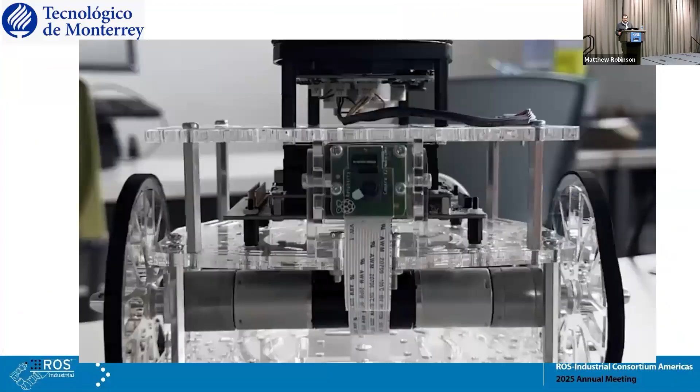Okay, well, basically, what we have here with the PuzzleBot, it is a Jetson. We have a camera, we have a lidar, and those students, particularly in the bachelor degree in robotics and digital systems, are basically learning how to program the device. So one of the main advantages of this undergrad program we have at Tec de Monterrey is that we are concentrating on teaching them the programming of the robots.

We also have at Tec de Monterrey mechatronics, where they are learning how to better integrate electronics, mechanics, and computing. And in the Bachelor of Robotics and Digital Systems, they deal with software engineering for robotics, basically.

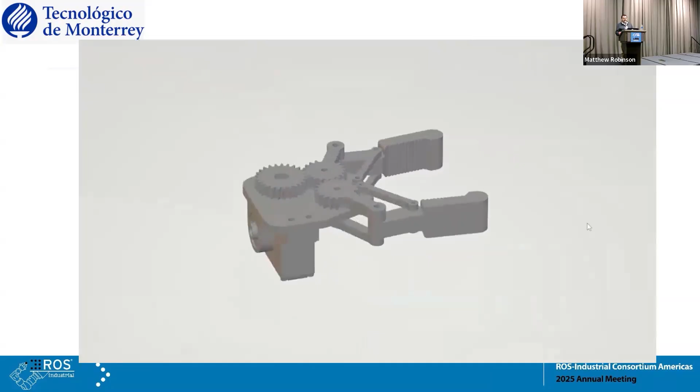So as you can imagine, at the beginning they learn how to set up the system and program with the Jetson. But one of the most amazing things is how we can push them to integrate new components, as was the case with developing a gripper and integrating it on the platform. The main idea was to set up a task where they navigate along an unknown space, so they have to rebuild it using SLAM. Once they achieve navigating with the robot and integrating the gripper, the main idea is that a user, a human, indicates to grasp a certain object. So the robot needs to navigate in the space it has already built, find the path, localize the object, grasp the object, and put the object abroad.

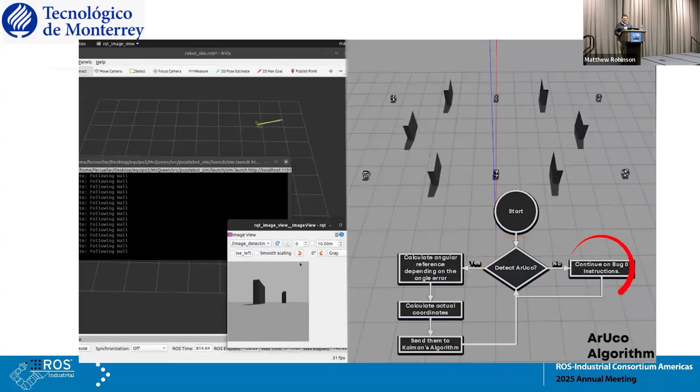So what are the most interesting things? Can we move a little bit, maybe 1 minute ahead in the video? Close to the end. Yeah, I'd just like to move forward.

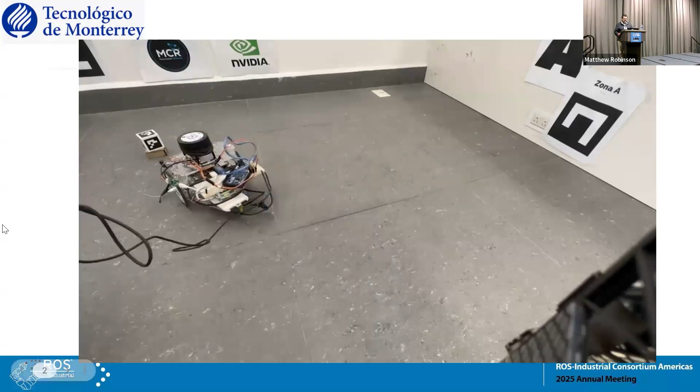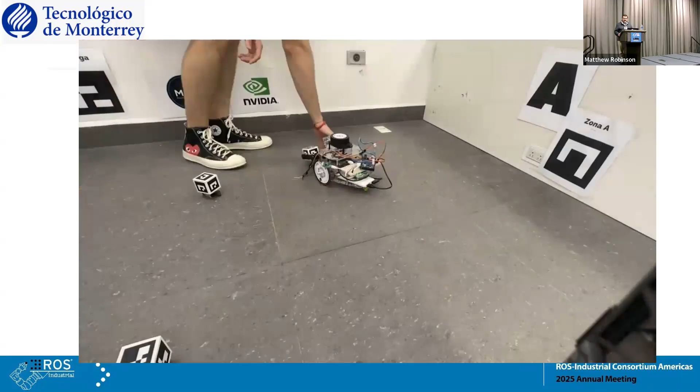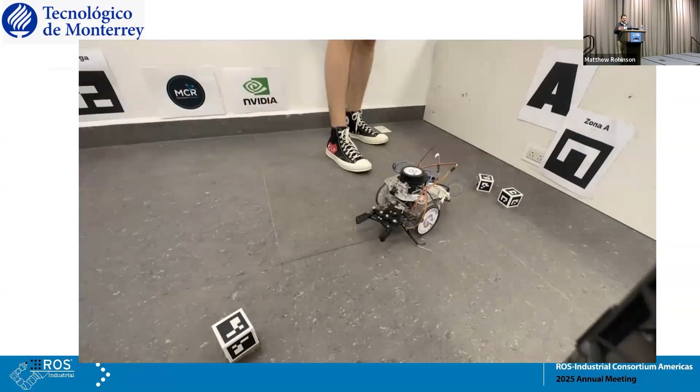So they spent the full semester working on that challenge. And what I like to underline is that this is a new model we have at Tec de Monterrey. They are learning how to program the devices, learning kinematics, dynamics, control, and programming, and they are given a challenge. In that case, the company defined the challenge, and we were in charge of supervising the students to achieve those results. So as always, as we have today is Teachers' Day worldwide, I'm very happy and very proud of my students.

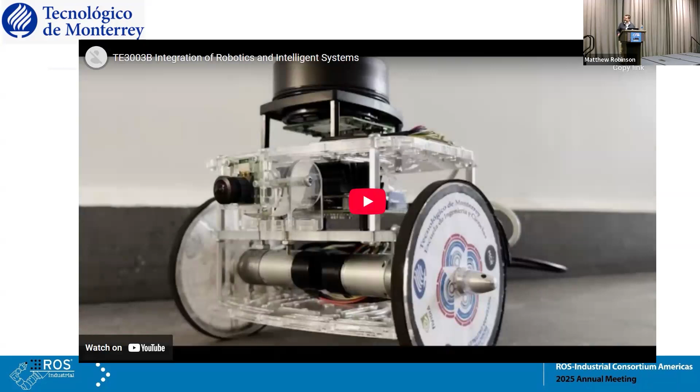So I'd just like to present a little bit about Tec de Monterrey. We are by far the largest university in Mexico, with presence nationally in 20 states. It's a university founded 81 years ago, established in Monterrey, close to Texas. We have already graduated close to 500,000 alumni, and we have very good recognition worldwide. We are basically an engineering school, and of course we have a business school, humanities, and other areas, but we are basically university-industry oriented.

So we have a very strong relationship with industry, and as you can imagine, one of the main challenges now with ROS Industrial is how we can better integrate ROS into the curricula. So we are starting with the robotics and digital systems bachelor. We have very nice dynamics with this project, with regular meetings with my friends at the University of Manchester in the UK. We are collaborating together, with sessions twice a week, 4 hours of collaboration with our partners. In that way, the students are at the same time learning about the use of the technology, and we are teaching the subjects, so they have the way to integrate the system.

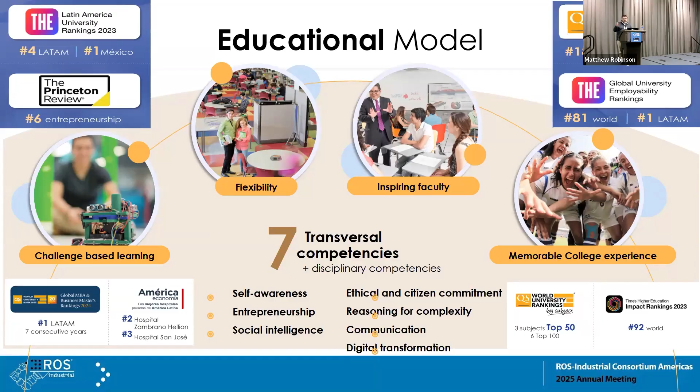As well, we are pushing the students to find a way to understand how the companies are actually working, and of course, they are complementing those subjects with a set of toolboxes that we are providing them during the time they are developing the project.

As you maybe remember, 2022 at IROS, we have this slide that sometimes is useful, because most of the students, the new generations, are looking for new challenges, so we are trying to align it.

In many countries, we have the obligation for the students during the curricula to spend 200 or 400 hours of time on social services. So we are working on a nice approach where we spend those hours implementing robotics on some of those challenges. For example, we are working on issues related to mobility and inclusion at Tec de Monterrey, and trying to invite the population, the community, to propose social problems. In the case of robotics, we invite them to participate using something that can be implemented in ROS.

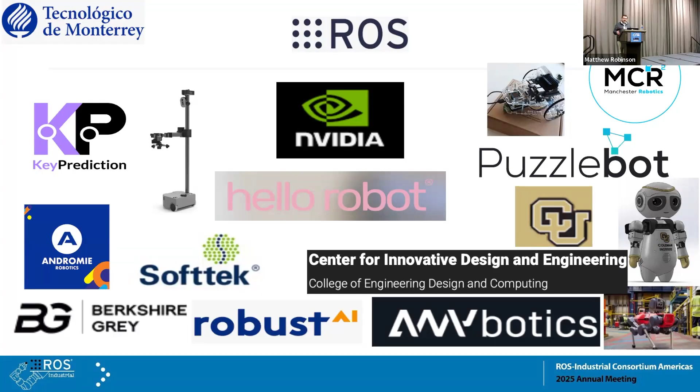Now we are trying to build a community in Mexico, so we are using a lot of materials from companies. We just acquired an ANYmal from ANYbotics. We are working with the Center for Innovative Design and Engineering at the University of Colorado Denver, and with Hello Robot. We have acquired a lot of robotics from other companies, trying to set up this community to make students and companies in Mexico aware of the importance of integrating ROS, industrial ROS basically.

We are combining research, innovation, and this Tec21 model in which we try to put the students to work all the time based on challenges, and at the end we think we can improve the way we use technology for societal pressures.

Now I would like to invite you to consider Monterrey for the next ROS Conference Americas, and of course people from all around the world are invited as well to come to Monterrey. I'm very happy to tell you that my friend Dave Coleman promised yesterday to sponsor a hiking trip in Monterrey, he's an expert there, he spent some time there. So now we have a sponsor for a hiking trip. Thank you very much.